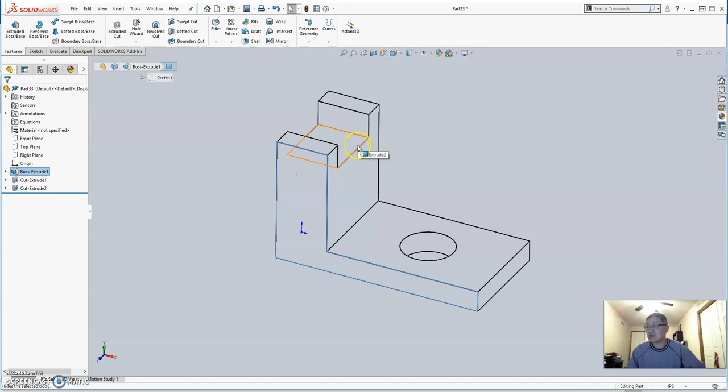Alright folks, in this video we're going to show you how to make this part, and once again we want to do some investigation to determine the best primary drawing plane. For this one there are different ways to do this. The easiest way actually is this: we're going to use the front plane, draw this profile, then extrude it this way, so we can make an L-shaped block. Then we're going to cut a hole on the flat part. We're going to cut a notch on the vertical part. Okay, let's go right to it.

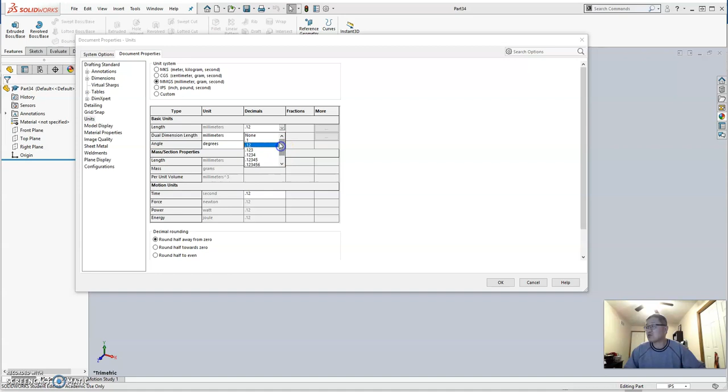Click New. Click Part. Okay, for this one, I want to make sure the unit is millimeter gram second. Once again, I want to click Edit Document Units. Make sure MMGS is selected, and for the decimal places I actually want to keep it as 0. Choose None. Click OK. So MMGS is selected. So we're ready to go.

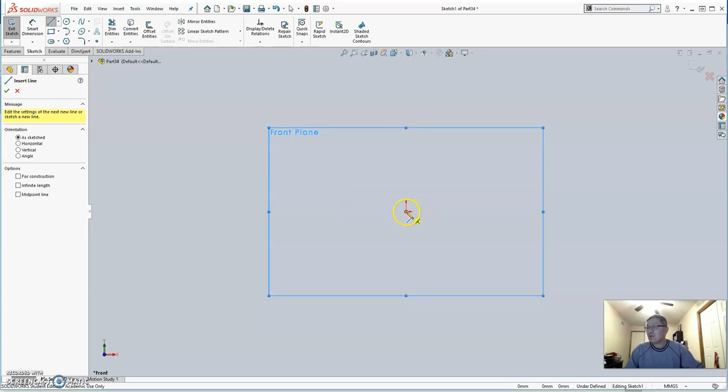As we determined, we're going to choose the front plane, and we're going to make a sketch. I'm going to first draw a line. Start from origin. Go to the right. Horizontal line. Vertical line. Go back. Go to the left. Horizontal line. Go up. Vertical line. Go left. Horizontal line. Make sure you have a dashed line. Click this point. Connect to the origin.

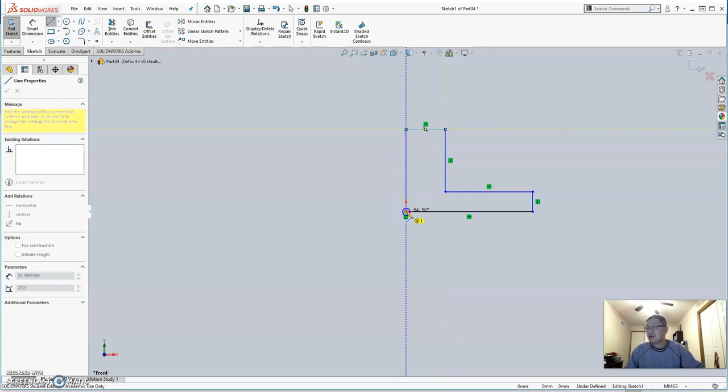Now we're going to use the smart dimension. We're going to define the width of this object, actually 100 millimeter, and the height of this object is 60, and the height of these steps is 10. And the width of this part is 25. Okay, it says fully defined. We are ready to go.

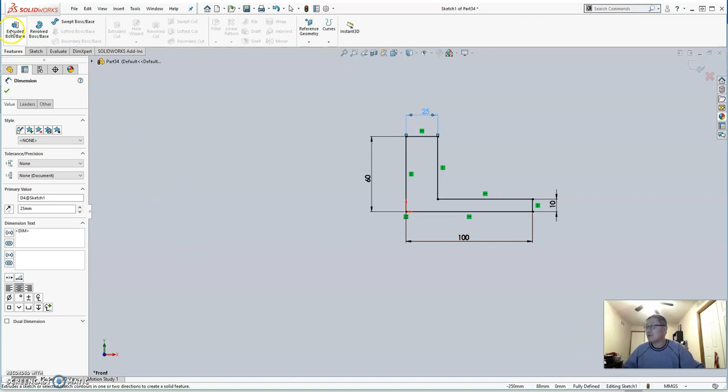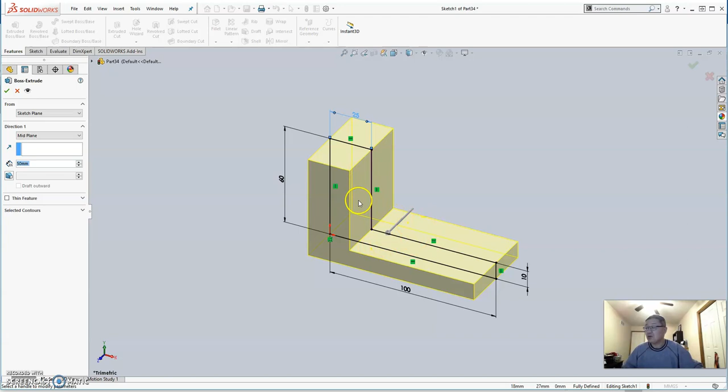Click Feature, Extruded Base. The extruded depth is 50. However, I want to keep the origin right in the middle, so for the extrude direction I'm going to choose mid plane. You can see the part is extruded in both directions, so the origin right here would be right in the middle. Click this green check. So we finish this L-shaped block.

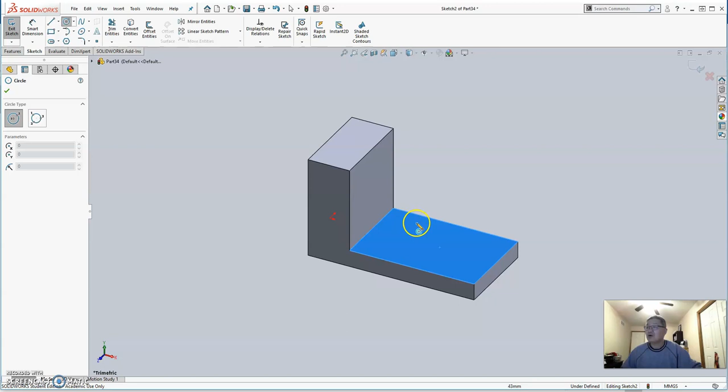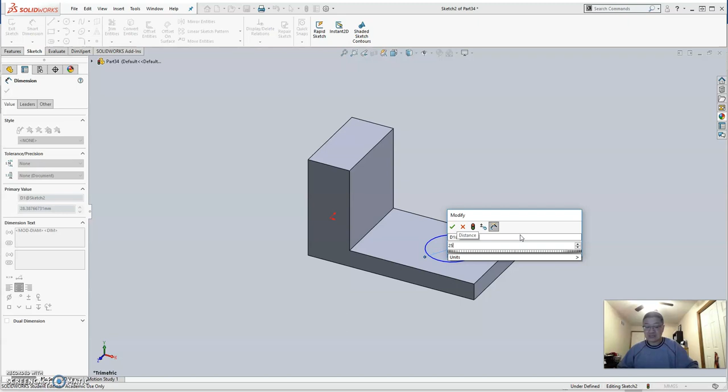Now we're going to make a hole on this plane. We're going to make a notch on this vertical wall. Okay, I'm going to click this flat part and make a sketch on the flat part. I'm going to make a circle. You can put the circle anywhere you want. Okay, now we're going to use the smart dimension. First, you want to define the diameter of that circle, which is 25. Yes, that's correct. That's 25. If you notice, it's still undefined because we did not define where the center is.

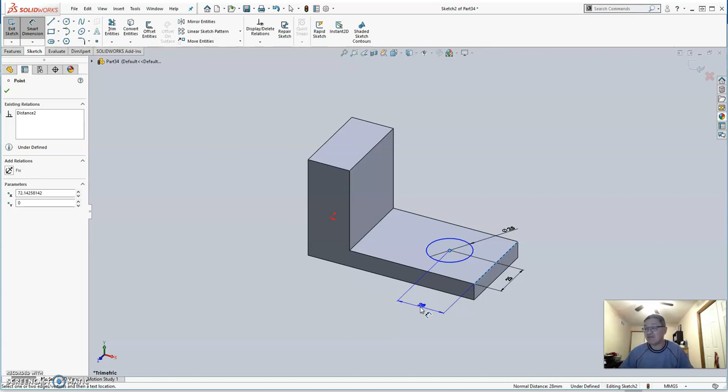For this one, the center should be in the middle of this block. So we're going to use the smart dimension. I'm going to click this edge. I'm going to click the center. This one should be right in the middle, should be 25 because the total is 50. Now I'm going to click this edge and this right here. The width should be half of the width from here to here. Because the total is 100 and the vertical wall width is 25, the flat part is 75. Half of that should be 37.5. So we're done with this, and it says fully defined. We are ready to go.

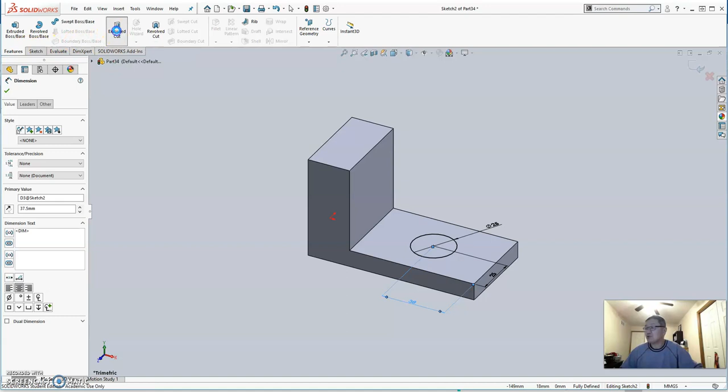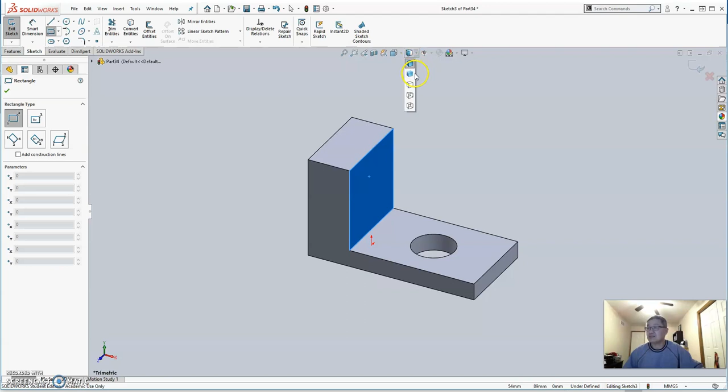We're going to click extrude cut. I'm going to choose through all and click this green check. So we finish this part. Now we're going to make a notch on this vertical wall. I'm going to click this surface, make a sketch on this surface. I'm going to choose a rectangle, the first one, corner rectangle. If you notice, if you have a lot of lines, sometimes it's a little bit harder for you to see the edges. So what you do is go to the display style, click hidden lines removed. Now you can actually see lines clearly.

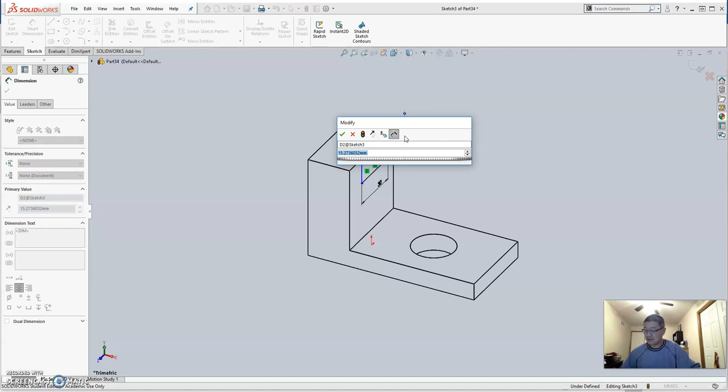Make sure you make your first click of the rectangle on this line, and move in a direction. We're going to use the smart dimension. We're going to define the width of the cut, which happens to be 30, and the depth of the cut is, let me see, 12. Okay, we're done with that. You also notice that it's undefined because where exactly this cut will be, we did not define that.

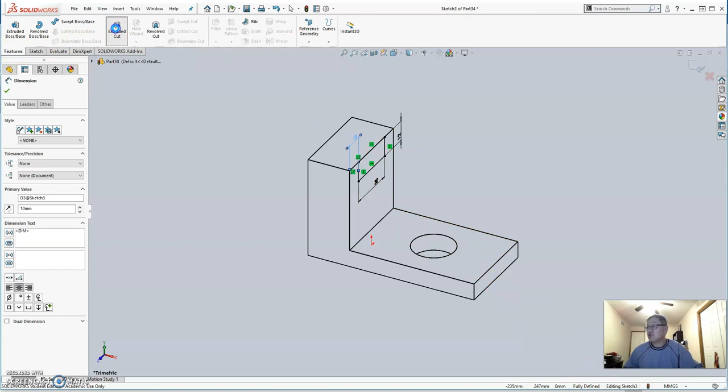This one should be right in the middle, and the total width is 50. The cut is 30. If it's right in the middle, this should be 10. So I'm going to click this vertical line, click the other vertical line, and go up. Dimension should be 10. Okay. Now it says fully defined. Click feature, extruded cut. I'm going to choose through all. Now click this green check. So we finish this. We have two cuts, one on the vertical wall and one on the flat part.

So we're good. Now apparently we cannot see the origin, so we can go to view and add origin, make sure the origin shows up. It's right in the middle of the back. If you rotate it, you will see it right in the middle of the back. So we're good to go.

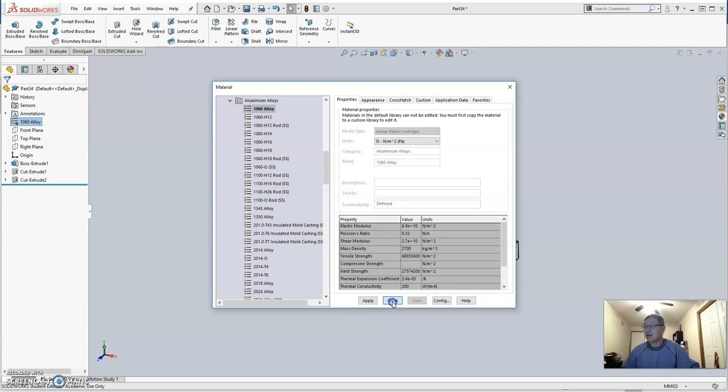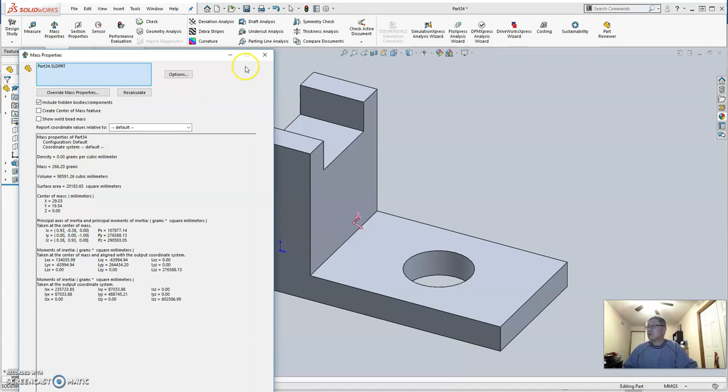We can also assign materials. For the material, we're going to right click material, edit material. For this particular material, we're going to choose 1060 alloy. Go to aluminum alloys, go to 1060 alloy, apply and close. If you click isometric view, that brings a nice good looking view. And if you go to evaluate, click mass properties, you can see the density, the total mass, 266 grams, so on and so forth. So we're good with this one.

Let's save this file as exercise E2.10.10.